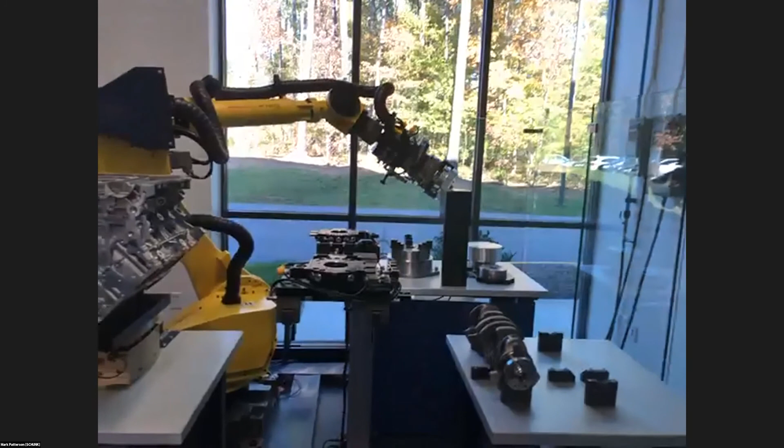But let's say you're looking at implementing something very quick and fast and cost effective in terms of that quick implementation. That's where we start to get into cobots a little bit more. People are buying cobots because they're at a good price point and they're easy to deploy quick.

But the thing that can really trip you up on the end-of-arm tooling side is if you have a process where you need something specific to your application, and if those standard products out there on the market don't work, then you're kind of stuck back at that original starting point of, hey, I've got to go either hire a design engineer to design this for me, or I have to spend the time and the money to figure this out. And then once I figure it out, I have to machine and manufacture my custom components like adapter plates and fingers.

So you can see on this tool right here, we have 2 grippers and custom fingers that we designed in order to pick up this crankshaft.

And we used angular grippers, so we wouldn't need too much stroke as we picked it up. So there's a lot of things that go into designing these custom end-of-arm tools. I just really wanted to show you guys from an industrial standpoint where that sits.

We're going to talk about our general products and how we've adapted them for cobots. We'll end at our cobot bar, and we're going to finish with talking about a very specific gripper series we call Flexscript Tools, which is essentially a really quick and cost-effective way to go from custom end-of-arm tooling that we just showed you, that engineers had to pick out, design around, and create, to using standard componentry that's all out of a catalog and implementing it within a couple of hours.

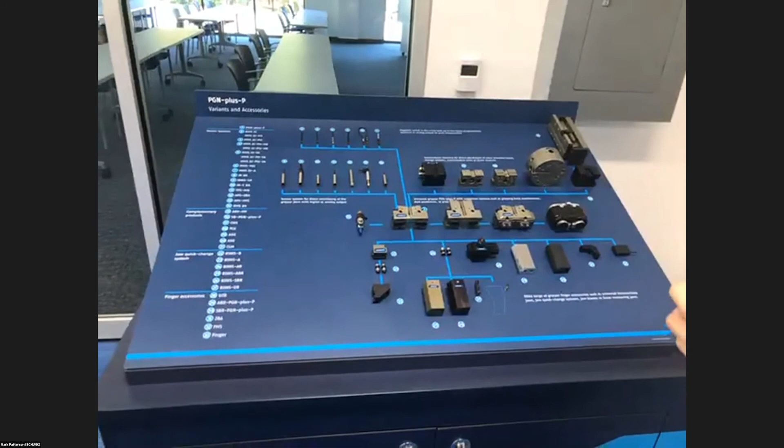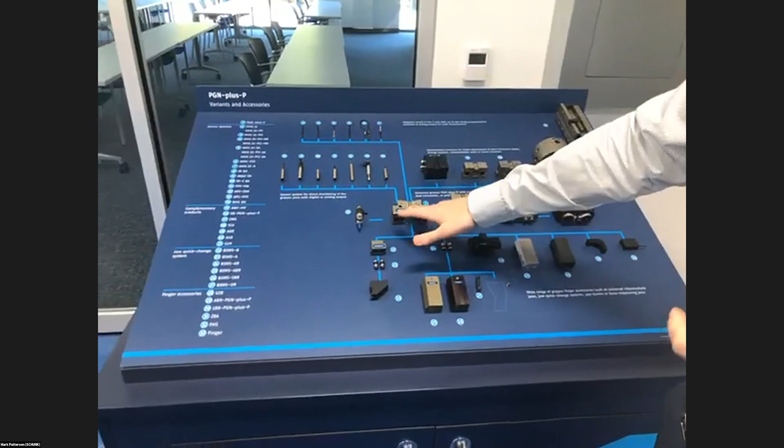So we're going to stop at our accessories bar right here. These are all standard components for us. As you can see, SCHUNK has literally a massive portfolio of everything you probably ever want for your application. So right here's a standard gripper. This is just a 2-jaw gripper, and we're branching out from this in all directions. So I'm going to start with this.

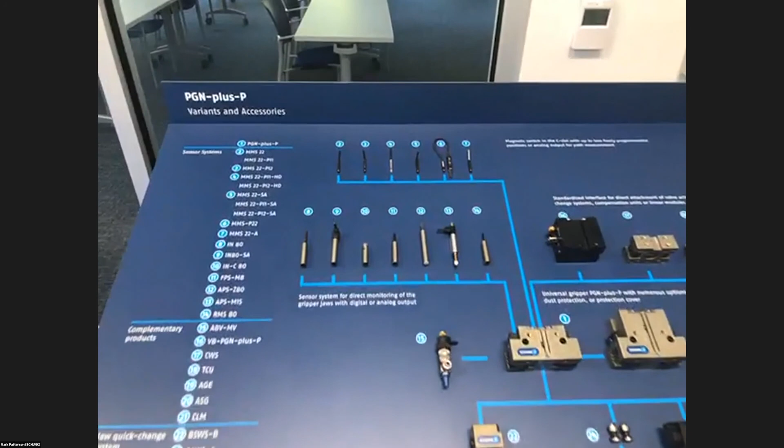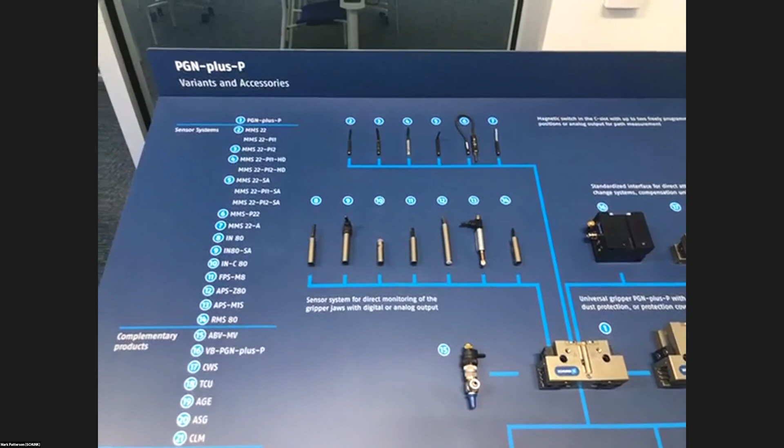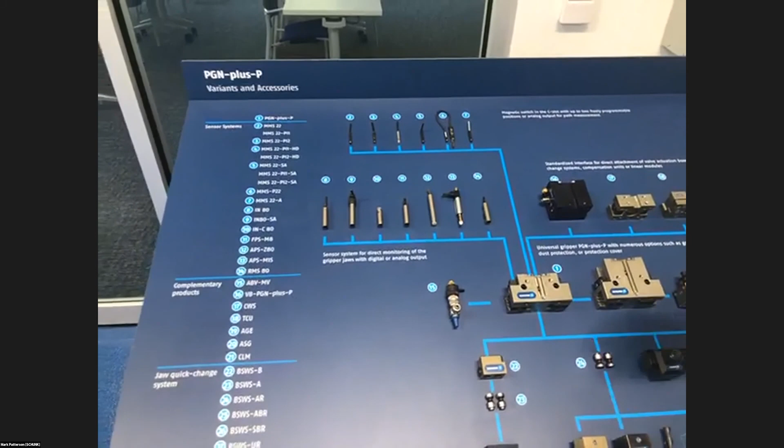These are all sensors. Those sensors all have different functionalities or different reasons why you choose them. For example, we have sensors where you can program 2 positions, so you get a confirmation if you've gripped a part, or open-close feedback, stuff like that. And then we have different types of sensors, like 5-position sensors to program 5 positions. We have inductive switches, pretty much the whole gamut of whatever sensor you need, we've got it for the gripper.

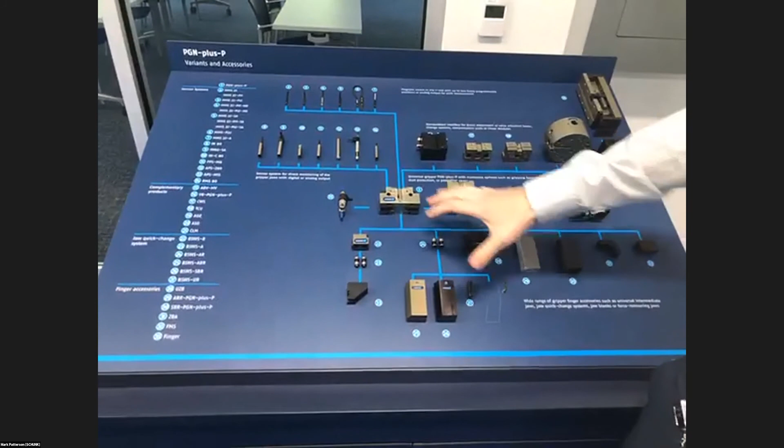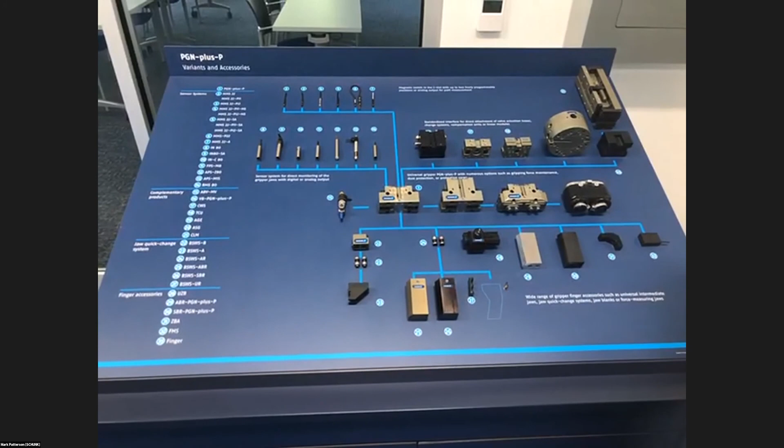Getting outside of sensors, we get into the gripper accessories. We make valves that port directly to the grippers, so you don't have to go out and figure out, okay, I've got to go buy a valve package from so-and-so. Now we make it very simple, very easy. It's all 24-volt digital I/O technology, so no need to really worry about communication protocols there.

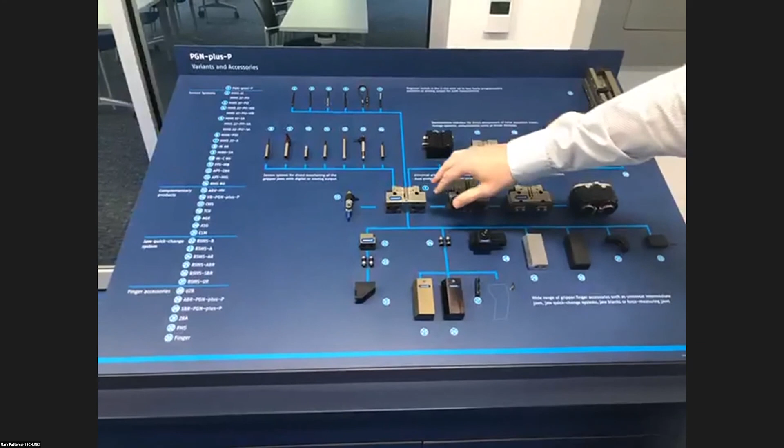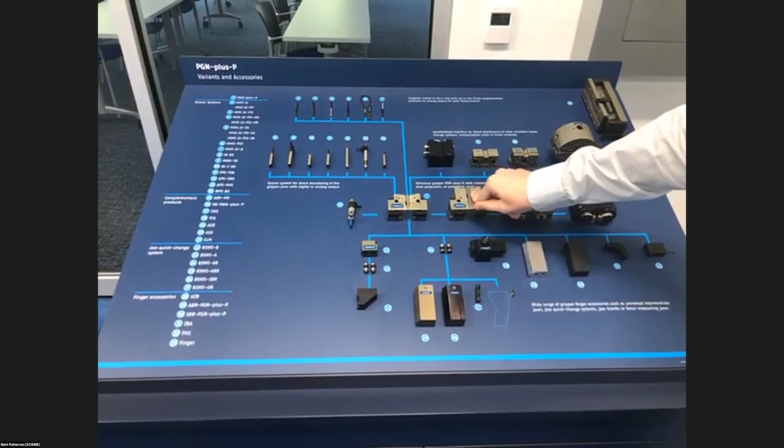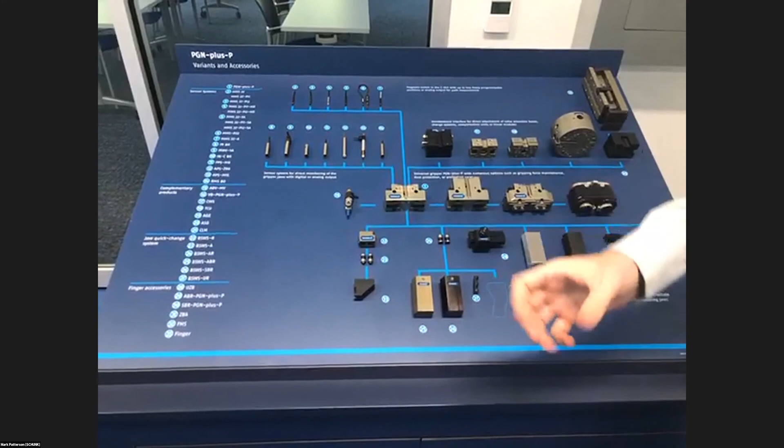Getting past that, we make different versions of the same grippers. So this is a standard gripper size for us. This is the exact same gripper series and gripper size, except this has a spring in it. We can offer it with a spring to close or a spring to open. It's still technically a double-acting gripper, since we do machine both ports here for open and close, but now you've got a spring in there in case you drop a part—it'll spring shut, or it can spring open if you have an ID pick. That's a really popular decision made in the automotive industry.

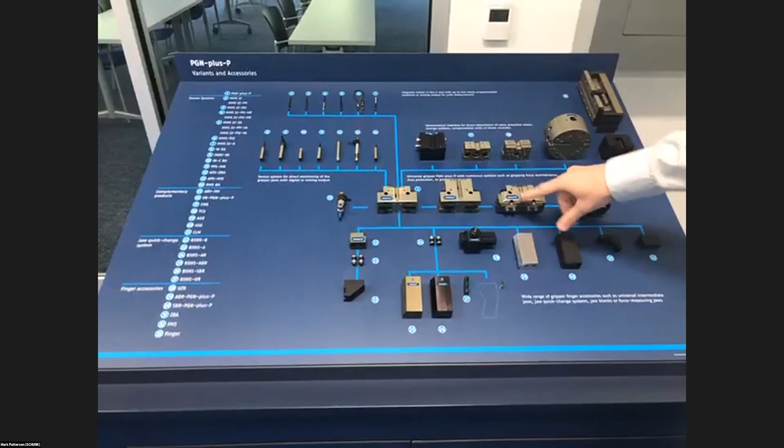Next, we have dust covers. We can beef up that protection if you're in a really nasty environment, like some of those grinding environments. If you're doing any type of machine tending on grinding, you're getting these fine particles, these chips. Sometimes those can work their way into the mechanical guidance of any gripper—it doesn't matter whose it is. Those things have just a way of working themselves into the worst spots and ruining them. So you can add dust covers for that extra bit of protection. We also have a purge port on there to add positive pressure to help protect it even further from particles getting inside the mechanical guidance.

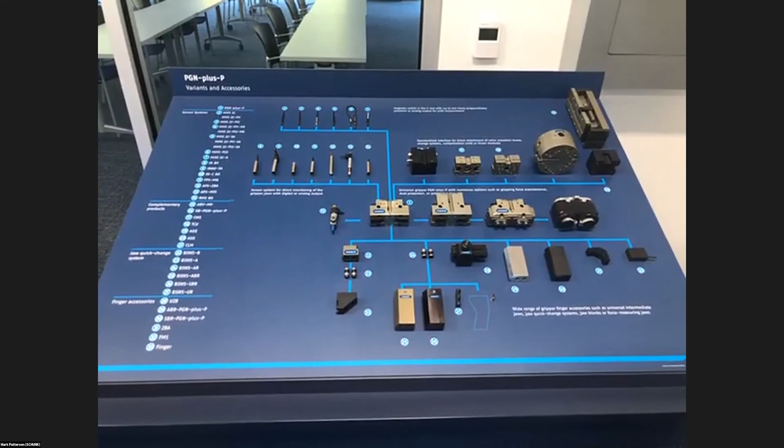We make boots, we make finger blanks, so you can machine your own fingers instead of having to go out and buy a piece of bar stock and figure out how to machine it. We make sliding base jaws that go back and forth so you can get that grip position in and out on a part. We make quick change fingers that use a hex key, so a quarter turn, and it pops off and on.

So if you have multiple parts and you need multiple sets of fingers to handle those, because it's very precise and you need that precision that we offer, we can help accommodate that for those quick changeovers.

So I just kind of wanted to show this, and then on top we have our accessories, and these are really application dependent. So if you have insertion applications where you need a little bit of give...

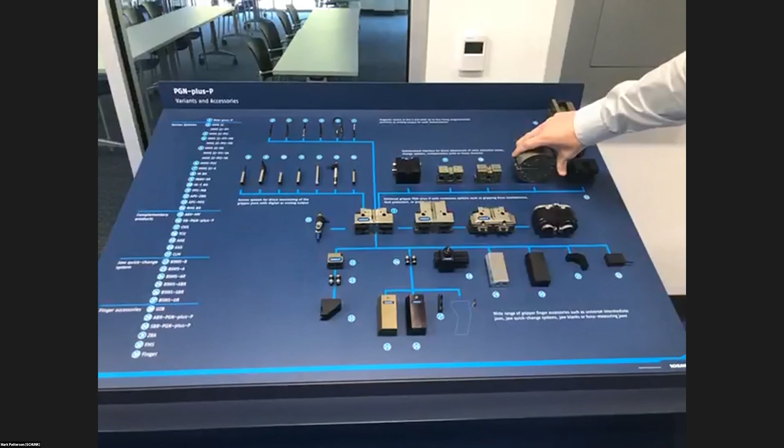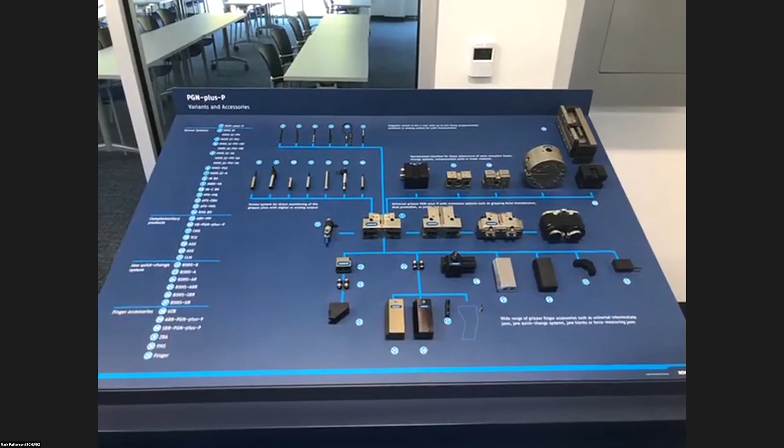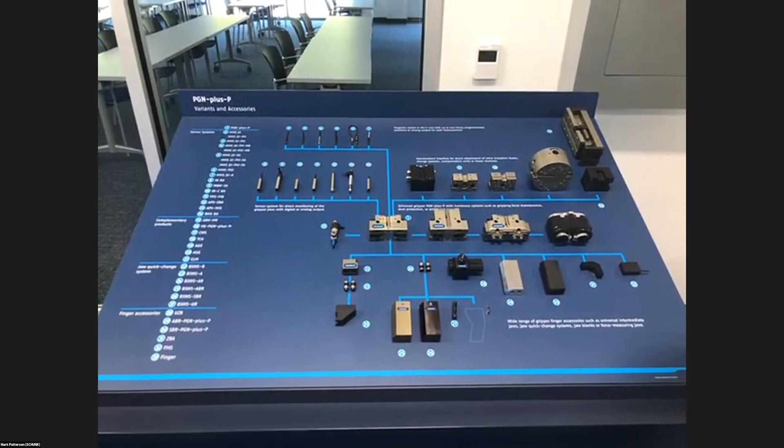If you need some kind of flotation as you're inserting it, we make compensation units that bolt directly to our grippers. Spring-loaded ones that just have essentially a rubber disc in them, so they offer very little compliance, but just enough that if you need a little give, you can have it.

So now we're going to move over to our cobot bar, where the sound will be much better. And we're going to focus in on this half, and we're going to talk about tooling for the TM Cobot here today.

And I'm going to start off with two products that are plug and play, right? So literally you buy it and you bolt it straight on, and you still got to figure out your finger solution, but we offer some standard stuff for that too.

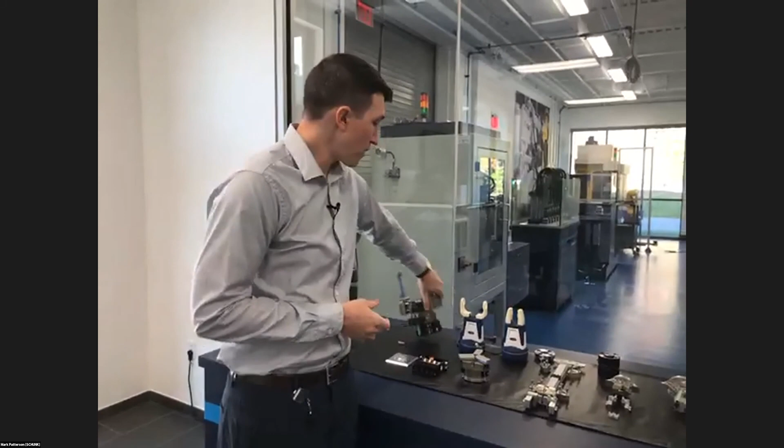So the first one we have is literally called Plug and Work Portfolio. And what our Plug and Work Portfolio grippers are is our standard grippers that are industrial grippers. So they're made to last. They're made for those hard applications. Hell, they're even made for those easy applications if you really want something never to break.

And the Plug and Work grippers, each one comes pre-wired with sensors. So the sensors are already ported up here. Inside of this intermediate cylinder, which this portion can bolt directly onto the robot, there is an I/O block in here for sensors. So we're handling your sensor communication up here. And also inside of here are two valves so that you can do open and close on this gripper, right?

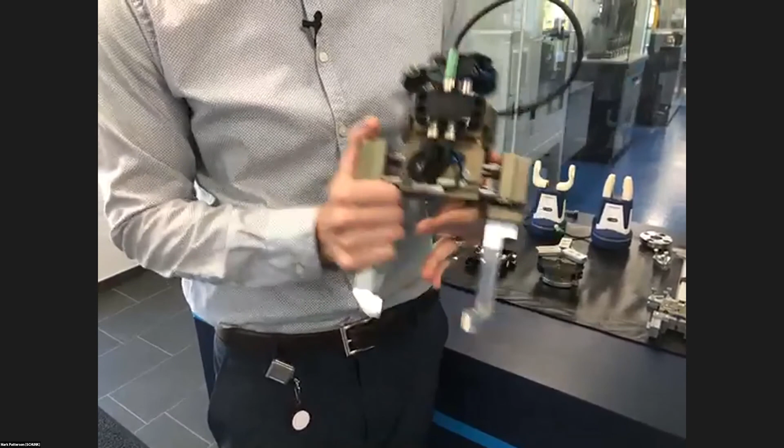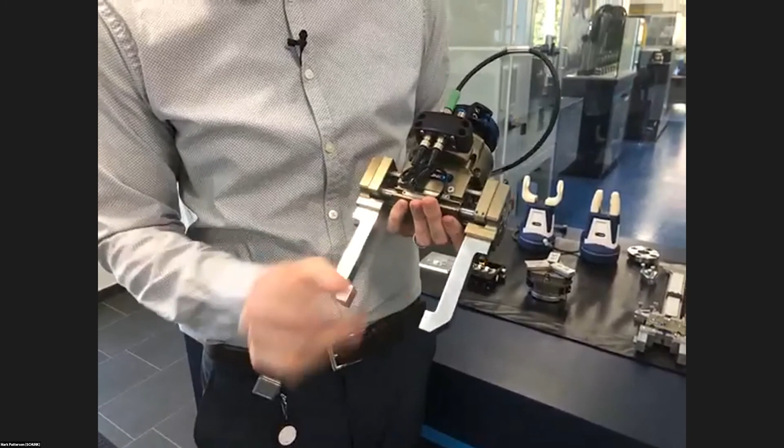This particular gripper is IP67. So it's really great for dirty environments. It can have massive fingers, longer than this. And we make an intermediate jaw if you want to buy our finger blanks, so that you don't have to do a whole lot of design work.

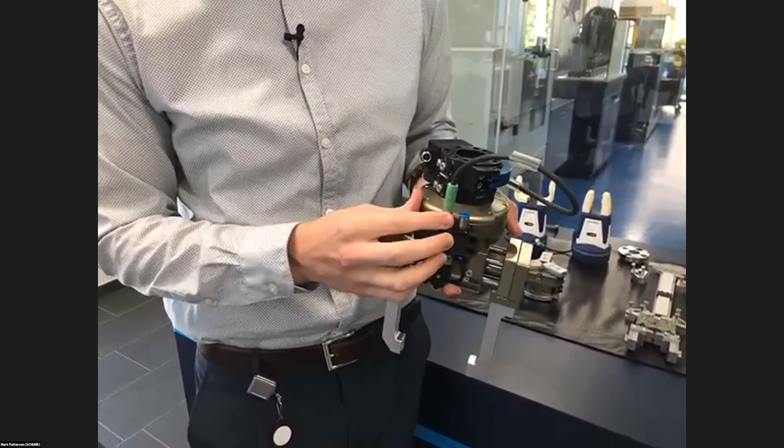So all of this is contained in here, comes out on a M8 8-pin wire, and we can connect that to what I've got here, which is a manual tool changer.

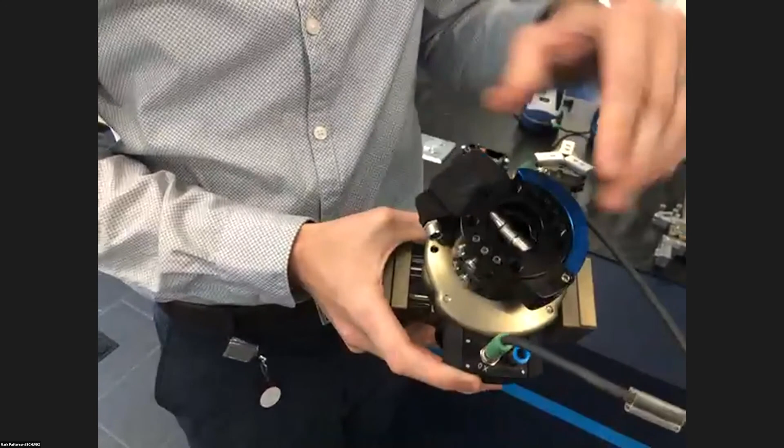So you can see this manual tool changer. The wire comes here on the master side. This would be attached to the master side of the robot. The handle comes back 180. It's going to feed through the pneumatics, so your air for this gripper, as well as your electrics, which would go here, and it would pop right off. It's very rigid. It's very secure.

This is all industrial equipment, so it's made to last, right? I mean, it's not coming out. It has a safety measure here. This pin has a lead in into a hole, which prevents this handle from flying back. You physically have to pull that pin all the way out in order to get that cam to unlock.

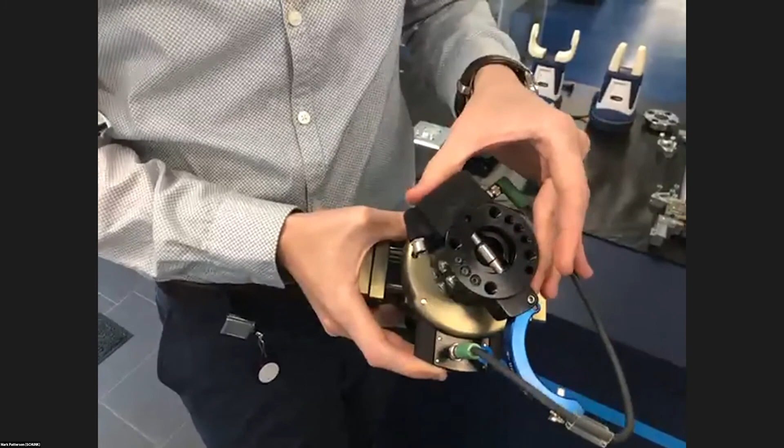So that's our Plug and Work series. We have two jaw grippers, long stroke grippers. We have high force grippers in that as well. And we've got a 3-jaw gripper.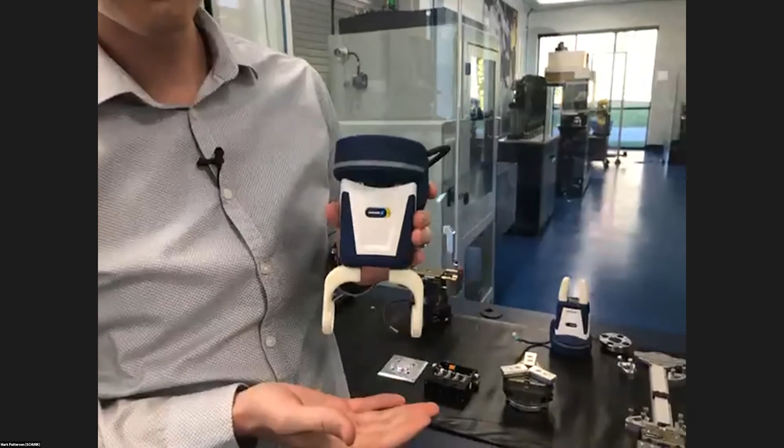We also have a couple of electric grippers, one that I'm going to pick up right now. This is our Coact EGPC. We make 4 different sizes for the TM Cobot. And this is a certified collaborative gripper. So it has the safety, it meets the safety requirements for end of arm tooling.

So it has a soft shell body on it. So there's no sharp corners. There's nothing that I'm going to hurt myself on here. There's no pinch points, unless you design your own fingers that way.

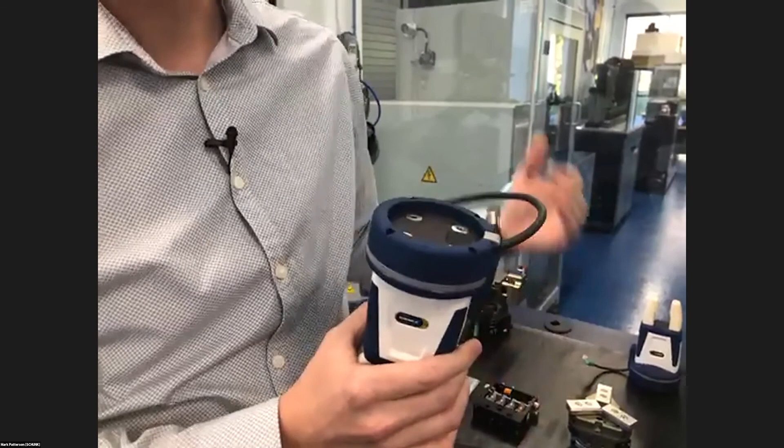But what's nice about this gripper right here is it's super cost effective. If you just need a simple gripper to pick up a part and you want to 3D print your fingers, or you're going to manufacture your own, it comes with the cable to go straight to the tool port, or you can get it in flying leads if you have something else that you're going to be putting on that tool port. So we can wire it up in the control panel of the robot.

And it's very simple. The way you actuate it is you send a signal to say open and a signal to say close. So if all you have to do is open and close your gripper to grip on a part, then this is a fantastic solution for you.

If you need to pre-position those jaws for any reason, we've got some other great options available. I don't have any on the table today, but if you reach out to us, reach out to E and M, we can start that conversation and talk about some of those full-blown servo options we offer.

So that's Plug and Work and our collaborative EGP, which is our collaborative gripper here. Now we're going to talk about my favorite product, FlexScript Tools. This is our Legos, right? So a lot of what we've really been focusing on is you doing all the work. It's either got to be a standard single gripper, which is kind of plain Jane, but what if you got some specific needs because of how your machine's going to be set up or how you're presenting the part? So now we get into FlexScript Tools, which was that standard product to do custom solutions.

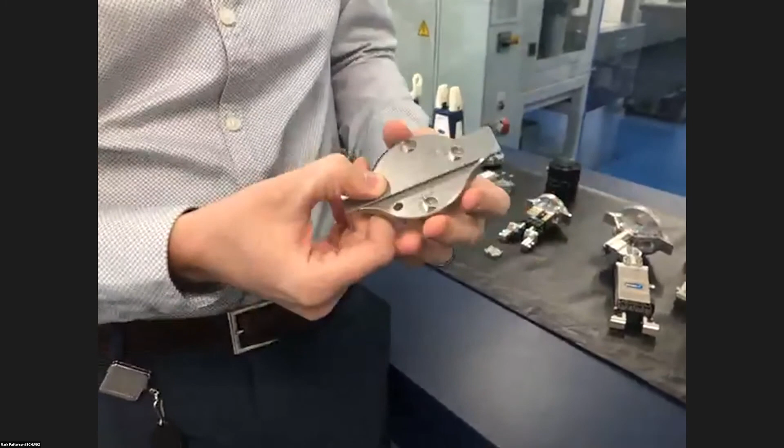So let's take a look here at the table. I'm going to start with this adapter plate right here. FlexScript Tools all revolves around providing you with everything in what we call kits. So what I'm holding here is the first adapter plate that we would put onto the robot wrist. We make a series of these plates. This bolts straight up. It has a dovetail rail on it, and this dovetail rail is where we connect our tooling.

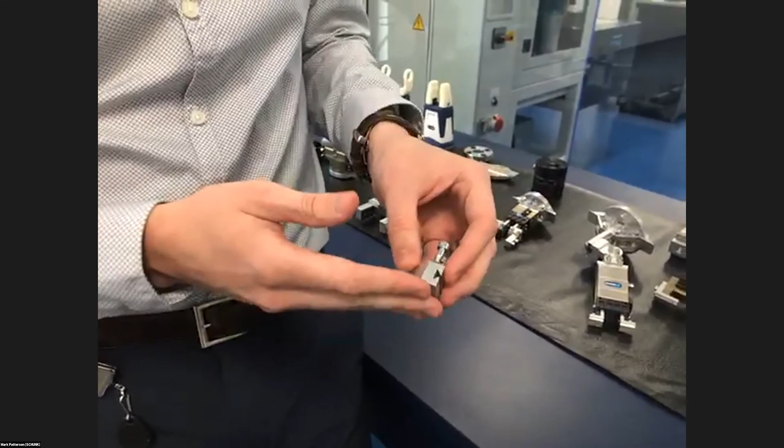So the tooling connects via clamps and connectors with dovetails on them that have screws and lock washers and everything. And this whole system is currently used in industrial plastic injection molding extensively, as well as some other industries that we're pretty deep in.

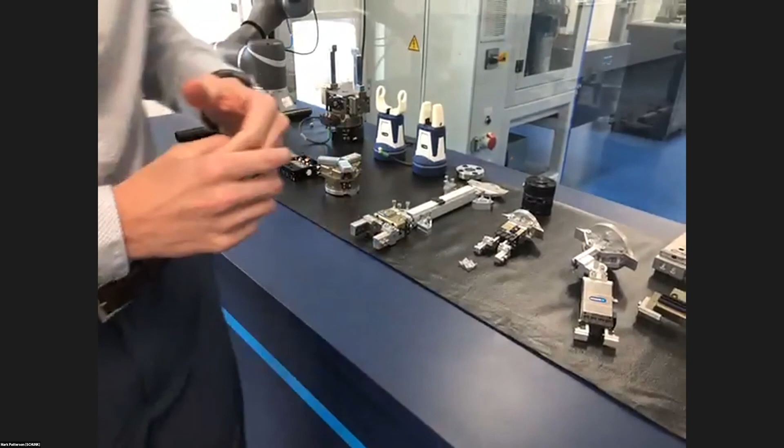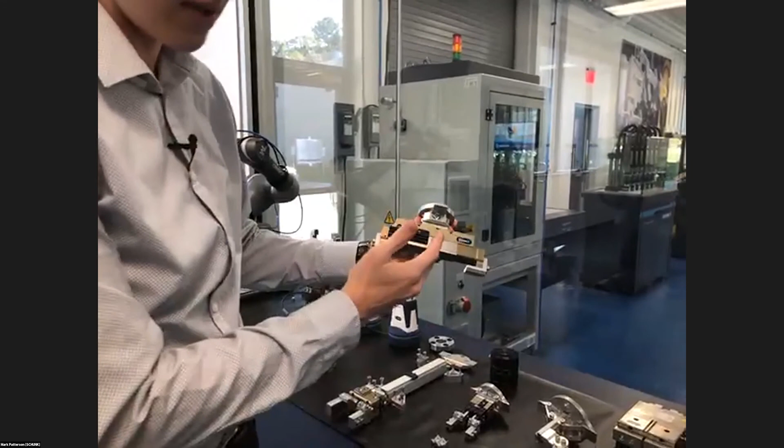But what's nice about it is, so you had that gripper, you could really only put it one way. You might be able to clock it a different way, but let's say you needed it at exactly 90 degrees. So you have your plate, you hook it up. We make 90-degree clocking connectors that clock directly to the gripper. And the gripper has its own adapter plate with the dovetail on it, so you can slide them off and on. So you could switch between this gripper, this electric gripper, this other electric gripper, this miniature parallel gripper, that 3-jaw gripper, or this 2-jaw gripper here, just by undoing the screws and sliding it out.

So what you'll also notice is we have intermediate base jaws on our gripper fingers. So we can also adjust our fingers without having to get into the expense of servo grippers where you've got this long stroke and you can pre-position. What we can do with these pneumatic grippers is this mounting post actually slides along this dovetail. So I can change my grip position to a part that's about this narrow, or slide it out a little bit further, or bring it in a little bit further, or flip this entire post around.

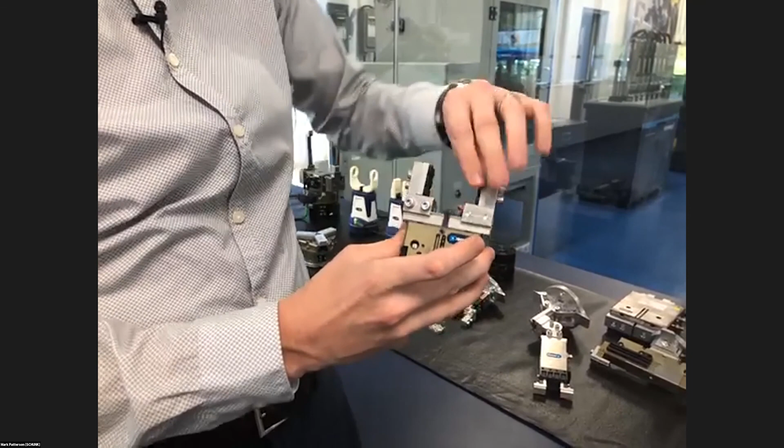And I wish I had an Allen key on me so I could undo this. I hadn't thought that far ahead, unfortunately, on that end. But...

So what's really nice, though, is these finger kits are standard components. So if you're a machine shop or you need to implement something extremely quick, if that's your mission, this is a fantastic solution because you can adapt it to whatever your needs are. You're not forced into a standard solution that has very little flexibility.

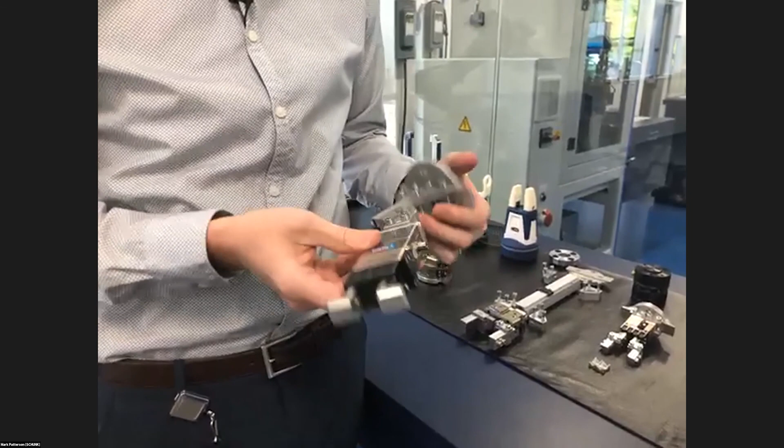So continuing on here, I really like this tool a lot, this design, because it's actually a design we have out there on one of our industrial arms. And this is used a lot in very tight spaces for machine tending. So you have it on the end of the robot arm, like so, and you go in and you pick a part like this, and then you're going to come in and you're already at this angle, so the robot doesn't have to do too much manipulation to place a part into a vise that's on the edge of an auto door, for example.

So this is a very realistic industrial style tool, and what we have here is our robot adapter plate. We have some offset, some right angle brackets to make an offset with a piece of our dovetail extrusion, and then a variable angle connector, which if you undo these middle two screws, you can actually swivel this all the way around. So you can adjust that angle to whatever your need is.

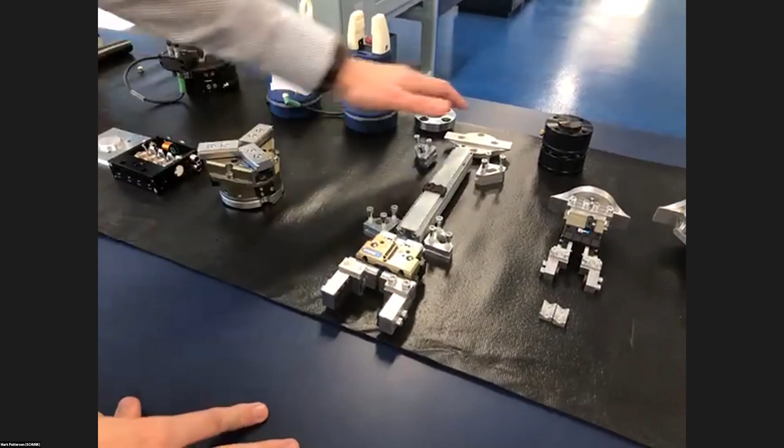So it's very convenient. And then I wanted to show a deconstructed tool here, so you can understand how this all gets pieced together. So we have our robot adapter plate up here. We have these right angle brackets right here, and they're really simple. It's got that dovetail on it.

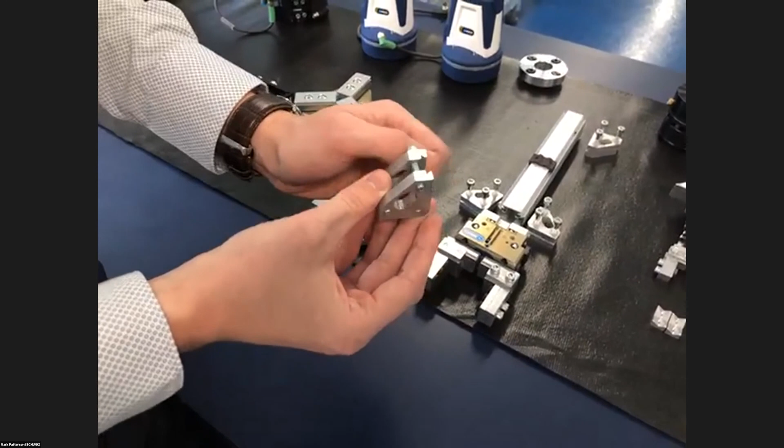I'm only going to do one because it's boring to watch people turn screws, but you see it just slides on. And you can even unclamp it all the way and clamp it on in the middle if you've already pre-assembled some of it, right? And then it all kind of fits together really simply.

So we've got this right angle. You add the other one for a little more support. And you can already see that we're starting to create an offset so we can get more reach out of our robot, right? And then this would go on the end with these two.

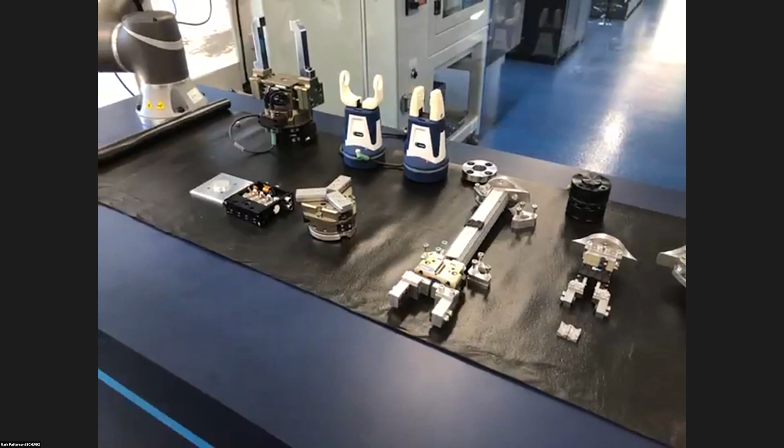You can just see that depending on how you set up your robot, because it has to reach into the machine, either you can't reach all the way in because it's too deep, or you have to reach down to grab a part below your pedestal. Something like this would be really cost effective and great to have, because you might not have realized that until you were setting up your robot.

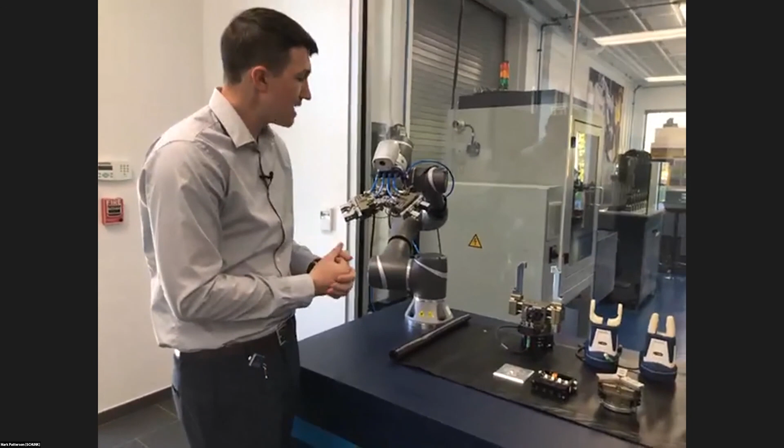So now we're going to end on this product right here. This is also in our Flexscript Tools packaging, and this is a machine tending setup. So what we have here, I'm going to start at the wrist and come down. We have a different style adapter plate, and this adapter plate bolts directly to the wrist like so.

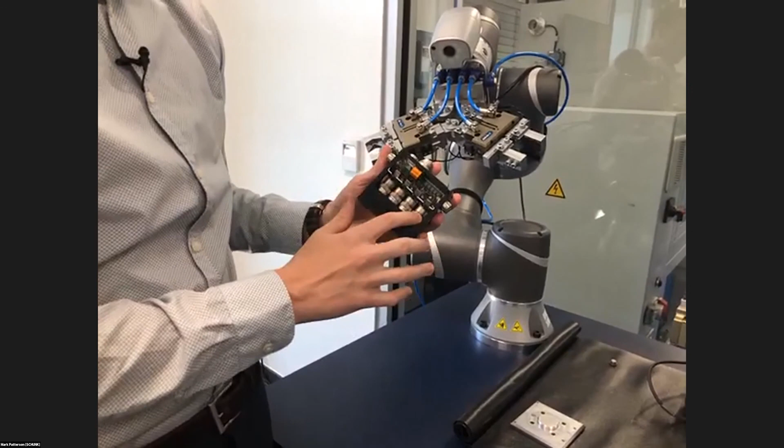And then what we do here is we can also offer it without the valves, but we've tried to make everything super easy for everybody. This right here is a valve package. There's 4 3-way 2-position valves. There's 4 sensor IOs, so you can have 4 sensors out there, so you know if you get open, close feedback. And you can actuate all of these grippers and receive the sensor IO all within this block.

It's got 1 cable that'll go down the arm, really bringing down the number of cables and tubing you bring up. And it's 1 tube in, so you don't have to worry about bringing 4 tubes up, or 1 big tube and then having a couple of Y splitters or something like that. No, it's very concise, it's very easy.

And it's all 24 volt and it's all actuated via digital IO, so it's not hard to program it, it's not hard to actuate these grippers. We use our variable angle connectors in order to make this connection. Tool plate and everything's kitted.

So we include the adapter plates, the screws, the fittings. The only thing we don't include is tubing. You're going to have to get that one yourself, but not too bad to get.

And on this setup, we've got our finger kits, which we have 2 styles of finger inserts: dual V-jaw for cylinders, as you can see here, rubber pads for that increased coefficient of friction if you want to pick up heavier parts with a smaller and lighter gripper, or you remove either one of them and we can use just a flat metal post.

So that's my presentation, guys. I hope I didn't take too much time and that you can still hear me.